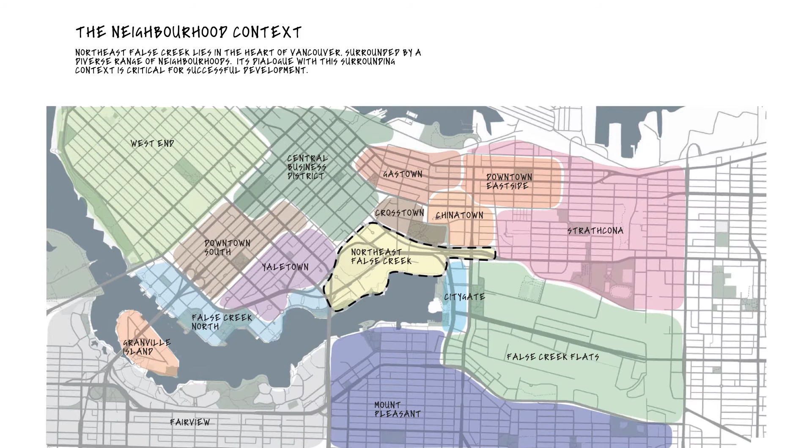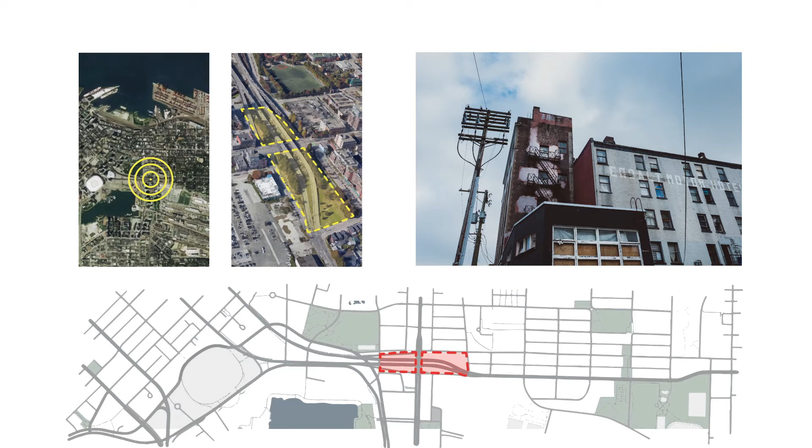Within the northeast False Creek neighborhood of Vancouver, British Columbia, Canada, there is an underdeveloped precinct containing the set-to-be-removed Georgia and Dunsmuir viaducts. Since their construction, they created an urban boundary, preventing the surrounding neighborhoods from developing integrated and inclusive communities. Today, the area faces demographic conflicts, and only several blocks north of the precinct is Vancouver's Downtown Eastside, home to a drug and homelessness crisis in the city.

You see, Vancouver is lacking in public hygiene facilities, affordable housing options, and accessible personal services on the Downtown Eastside. This causes homelessness and prevents vulnerable people from finding their path in life. Seeing this situation in the city I live in inspired me to pursue a potential architectural solution with my proposal.

This difficult physical and social context is the site for the project, which looks to regenerate its context to a welcoming, sustainable, and resilient community through a broad system of values and strategies embedded into the design decisions made.

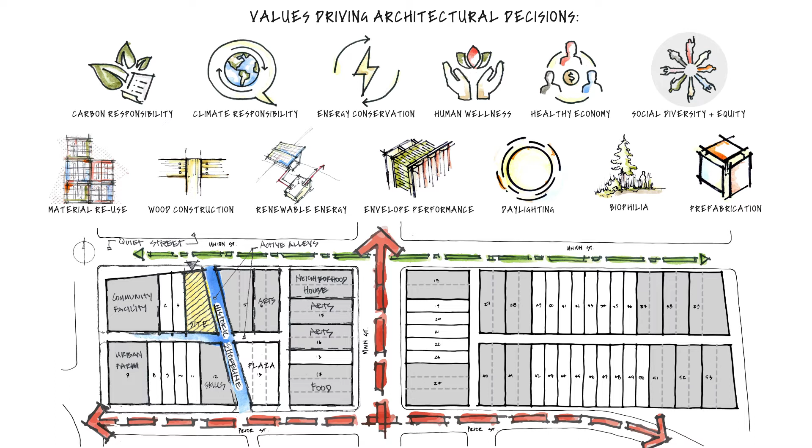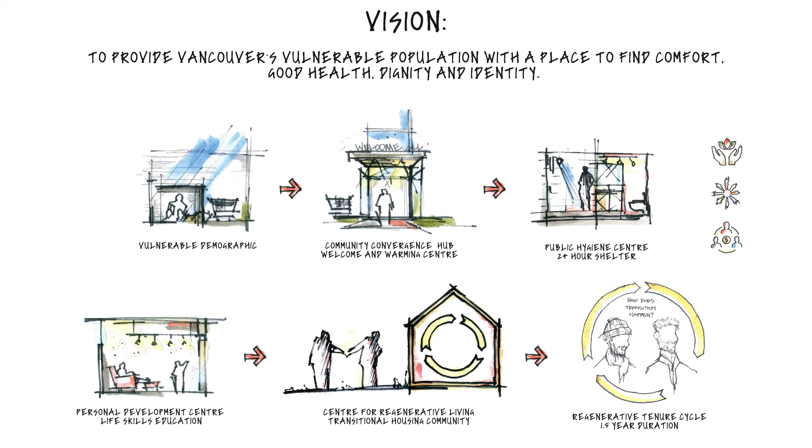The vision for the architecture is to operate as a system in which people are accepted from diverse backgrounds of hardship, offered their basic needs, along with an opportunity to practice and develop life skills. The idea takes shape as a facility for personal transition and development, complemented by a transitional housing component for at-risk people in their journey to recovery.

The building is a mixed-use development comprised of 2 commercial stories from ground and 6 residential stories plus an accessible rooftop above. The first story contains a day-use hygiene facility and shelter. The second story complements the first by providing a personal development center.

The residential stories contain 60 self-contained micro-dwelling transitional housing units across 5 levels, where 2 units can be converted to a single wheelchair-accessible unit. In addition, 2 shared amenity levels sandwich the dwelling levels to create an internal community within the building. The third story is the first amenity level, containing communal spaces for residents as well as functional spaces.

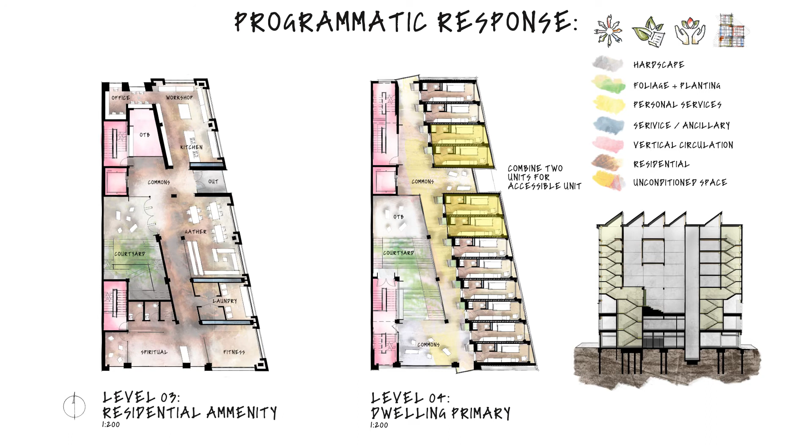The 4th through the 8th story contain the dwelling quarters, where 2 alternate dwelling level layouts accommodate varying user group needs. The 9th story is the second amenity level, which provides an outdoor roof terrace and planted green roof.

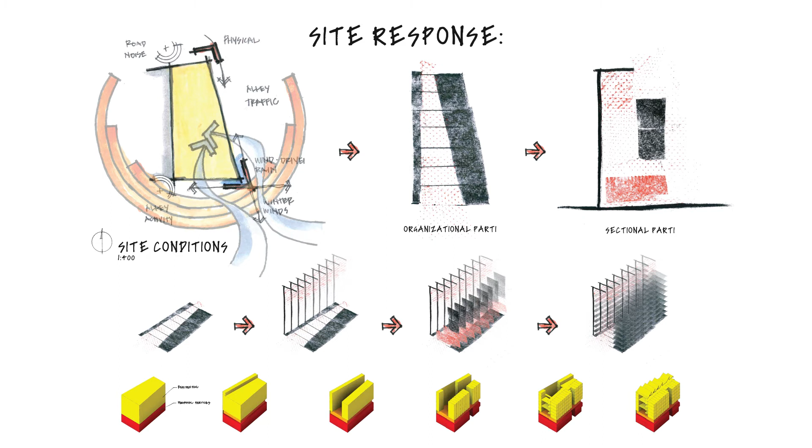The external east orientation of the dwelling units allows for universal daylight autonomy in all occupied spaces, while leaving the internal spaces running north-south for horizontal and vertical circulation of people, air, light, and community. This enabled the opportunity for an activated courtyard.

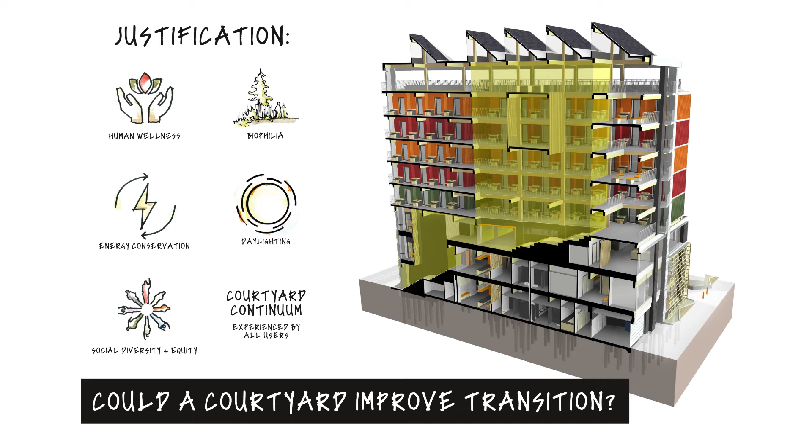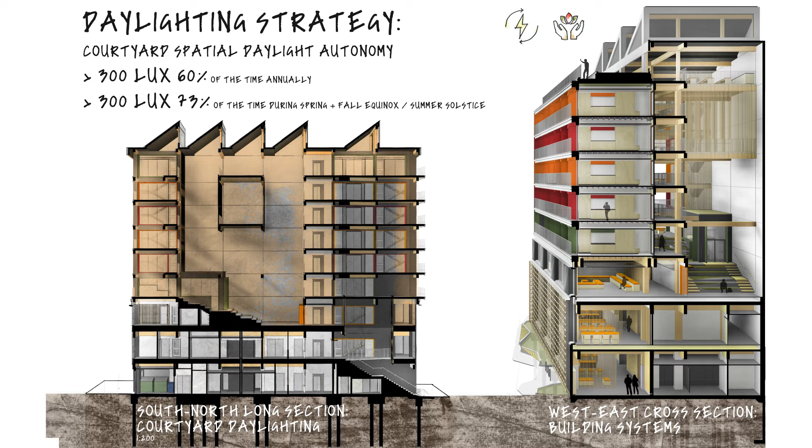The unconditioned volume created by the courtyard reduces the thermally conditioned space of the building, therefore minimizing operational energy demand and cost. It also provides solar access and daylighting opportunities to the internal environment, which reduces electricity demand and elevates human well-being. The courtyard also allows for vegetation growth within the shared volume, as well as on the planted roof terrace, allowing residents universal access to nature.

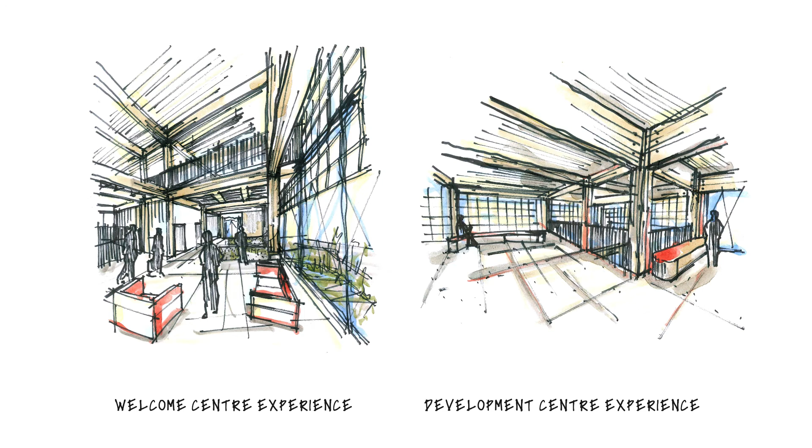In creating regional and place-based architecture, the building is to be constructed primarily from mass timber. In doing so, the building's embodied carbon can be vastly reduced. Mass timber construction also offers logistic and aesthetic benefits for this project through prefabrication, modularity, as well as visual and tactile beauty.

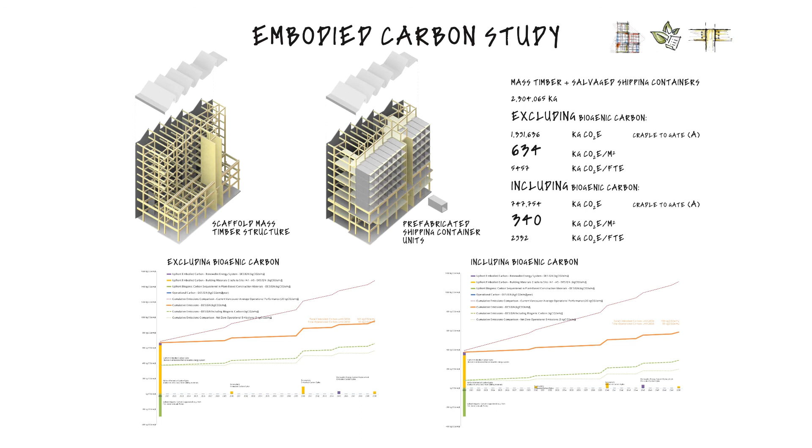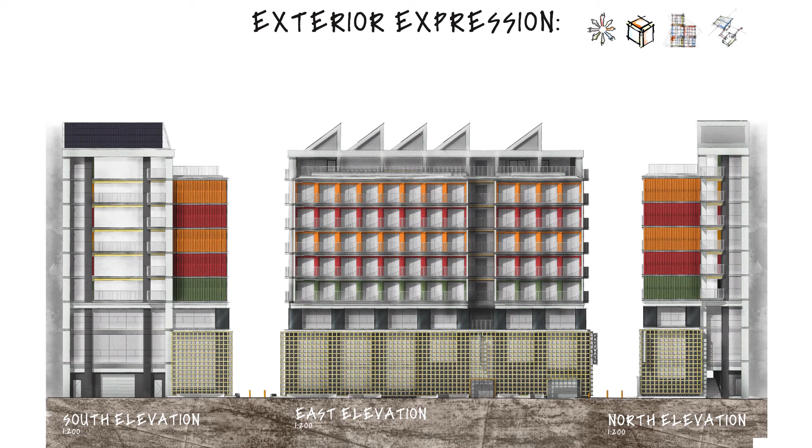Architecturally, the building reflects the nearby Port of Vancouver through expressing salvaged shipping containers as the skin and structure of the dwelling units. The shipping containers are prefabricated as finished dwelling unit volumes with a high-performance building envelope, reducing operational energy demand. The salvaged material embedded in the building also avoids additional embodied carbon. This idea of material reuse is one of my favorite aspects of the project.

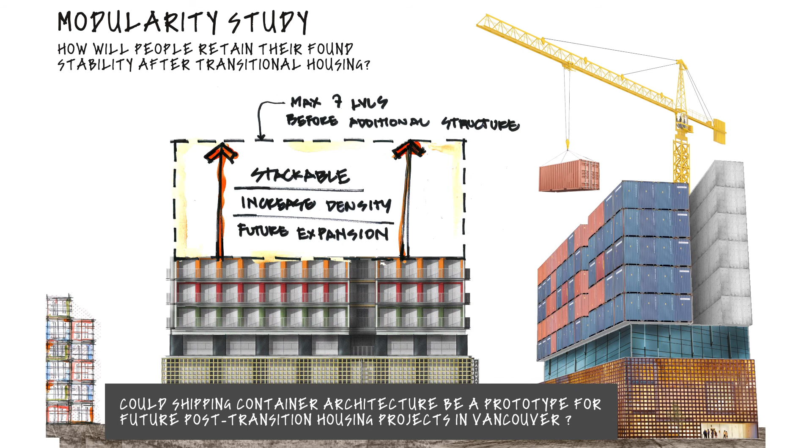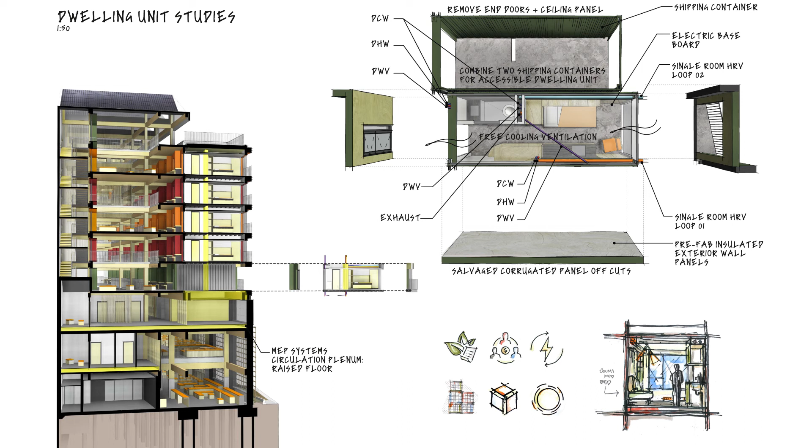The prefabricated volumes are modular and can accommodate future expansion or even disassembly in the face of drastic environmental or climate crisis. Both the commercial and residential components of the building have efficient mechanical, electrical, and plumbing systems designed to be concealed and distributed in raised floor plenums on the commercial levels before rising into vertical distribution shafts for the residential levels.

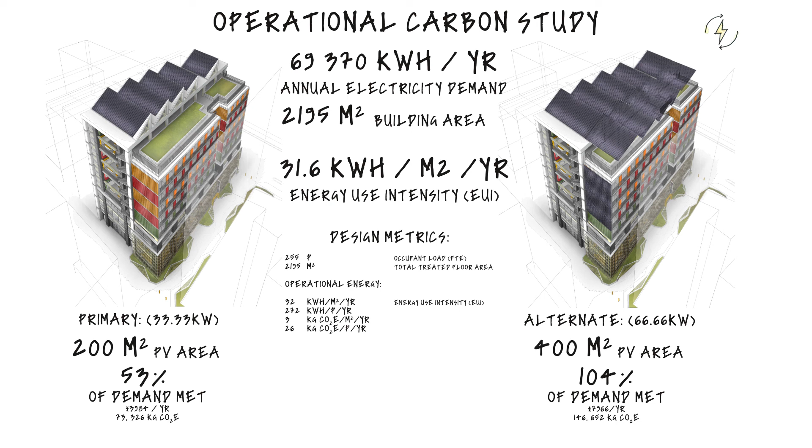Renewable energy was also considered to provide the development with resiliency. Despite the small development site in the urban context, the optimal photovoltaic array design for the site was able to power 53% of the building's total electricity demand. A net zero option was possible; however, it eliminated the desired open-to-sky green roof for the building residents with the increased size of the solar canopy.

Throughout the design process, environmental and social responsibility were broad values in the vision for regenerating the surrounding community. These values come together in the architecture and address the needs at the heart of the issue to create the greatest regenerative potential. As an experiment, I believe this proposal could begin to define the ways in which we could benefit as whole communities and neighborhoods through the way we develop individual functional programs vital to society and knit them into existing physical and social contexts.

Moving forward to my career in architecture, I plan to work towards these types of regenerative projects because they make the greatest positive impacts towards the natural environment through the built environment.